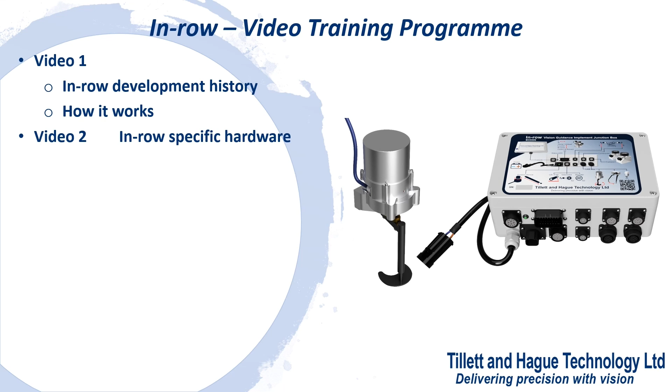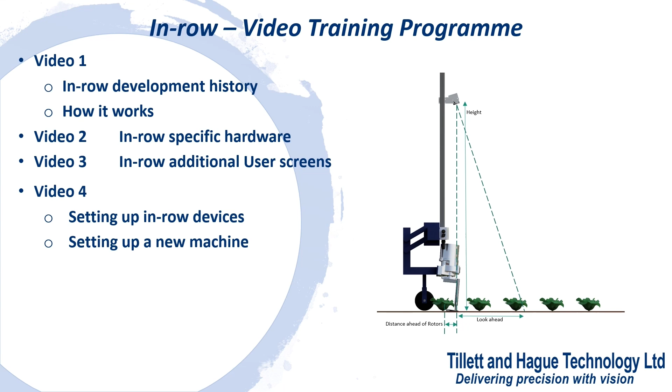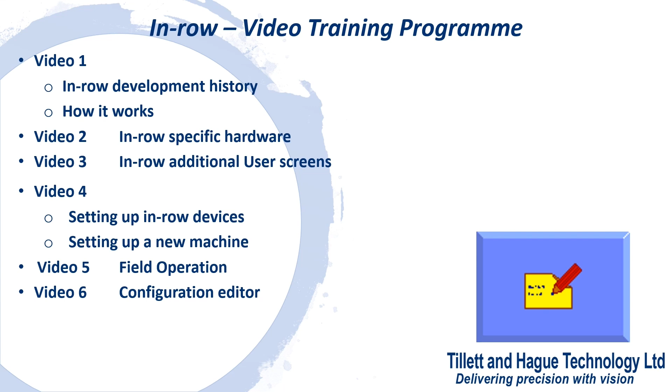After this introductory video, in subsequent video tutorials, we will examine the in-row specific hardware, explain the additional in-row user interface features, show how you might go about setting up a new in-row machine, and how to operate that machine in the field for the first time. Finally, in video 6, we will discuss how to use the configuration editor to configure additional in-row features. You can select the video you need from our website and view it as many times as you want.

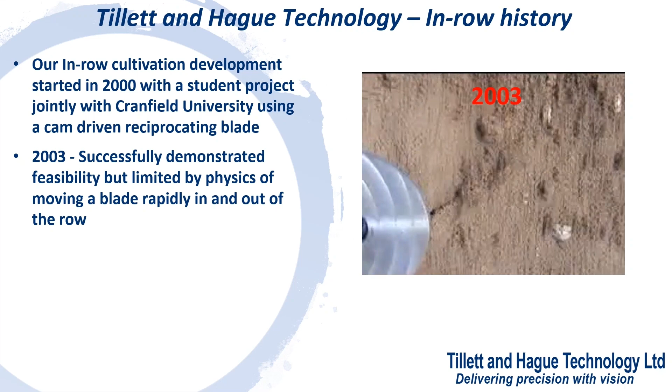Whilst we had been thinking about the in-row weeding problem from the early 1990s, it was not until the year 2000 that we made our first practical steps with a small project that demonstrated feasibility, but highlighted many challenges, notably the difficulty of achieving good within-row cultivation coverage at high speed. It was clear that systems with reciprocating blades would always be a compromise between speed, input power, robustness, and soil throw.

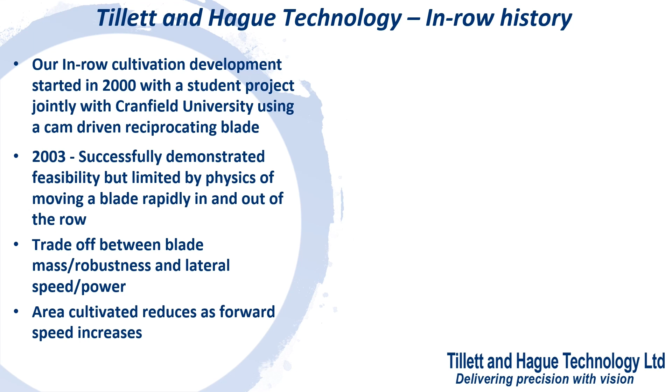Furthermore, for any system with a fixed insertion and retraction speed, the area cultivated inevitably reduces as forward speed increases. That realization stimulated our idea for a continuously rotating blade, phase locked with plants as they were tracked through an image sequence.

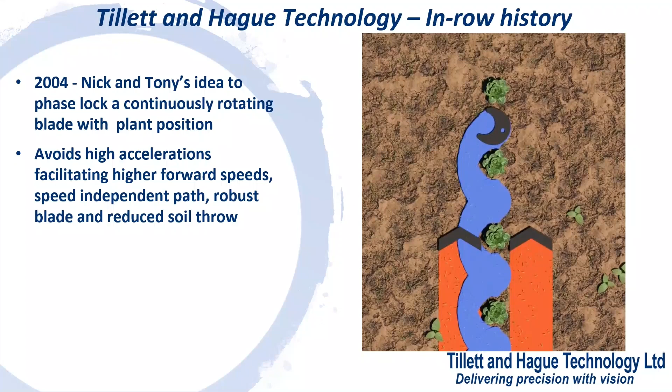This avoids high accelerations, reducing input power and soil throw. If engineered correctly, it also makes cultivated area independent of forward speed. Furthermore, reduced accelerations mean the whole mechanism can be made heavier and stronger without a performance penalty.

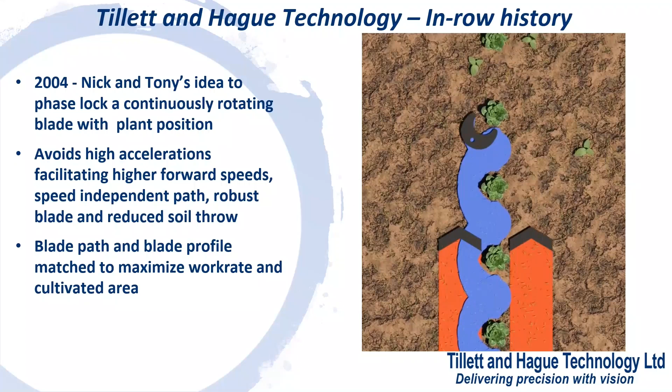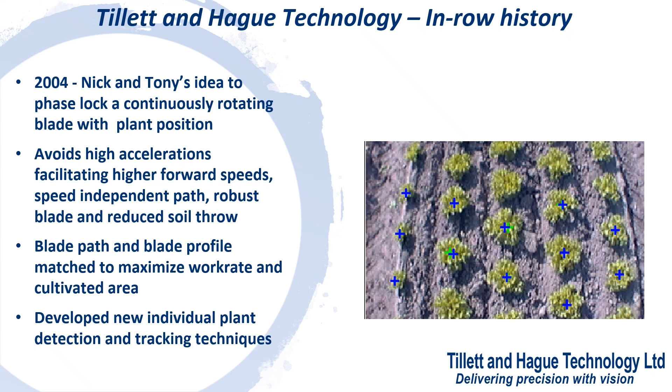The trick was to design matching blade profiles and smooth dynamic paths that gave good coverage without crop damage. Of course, we also needed to extend our image analysis algorithms to robustly detect and track individual crop plants as well as crop rows.

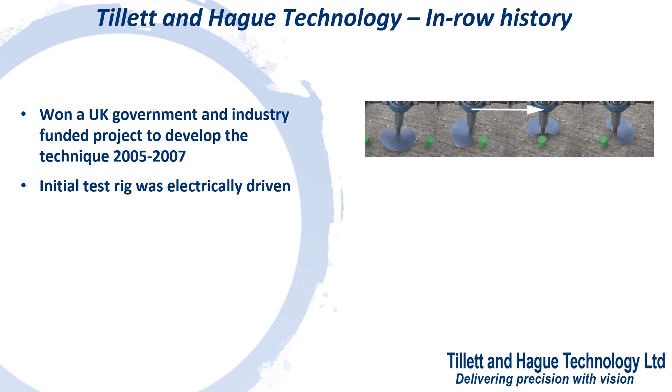Development of our rotary blade technique started in earnest in 2005. The first rig was electrically driven but had limited power. So, for production machines, a hydraulic motor regulated by a proportional valve was employed to deal with the relatively harsh weeding environment. It is shown here in prototype form.

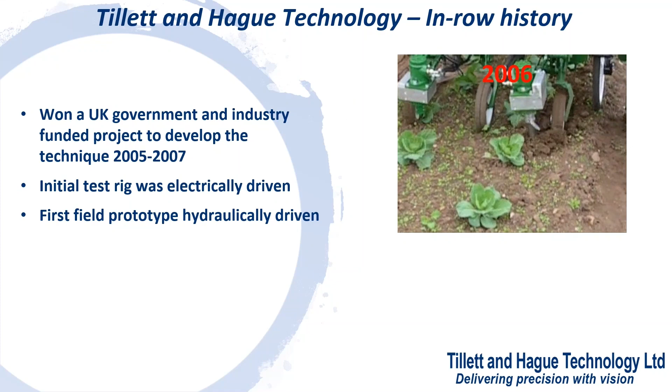The project was a success, and Garford Farm Machinery started selling hydraulically powered in-row machines using our technology in 2008. This video is an early example.

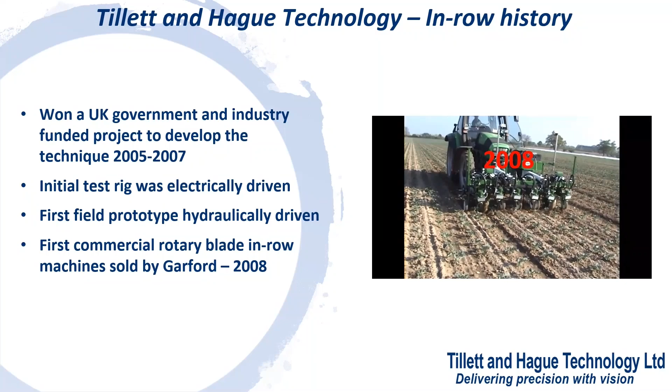At the request of a Californian customer, we also introduced the option to use the same machine running alternative software to thin salad crops, deliberately taking out unwanted plants to optimize spacing, as seen in this video, which dates back to 2008.

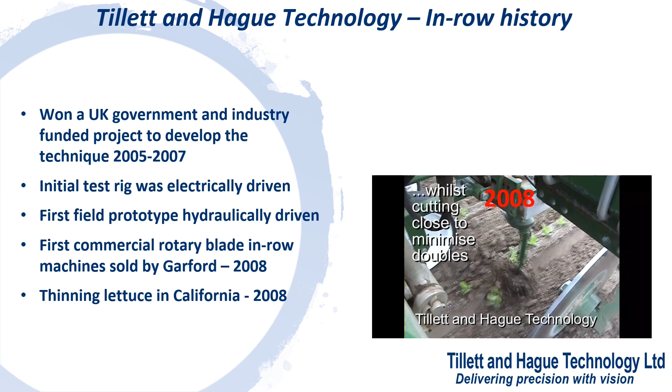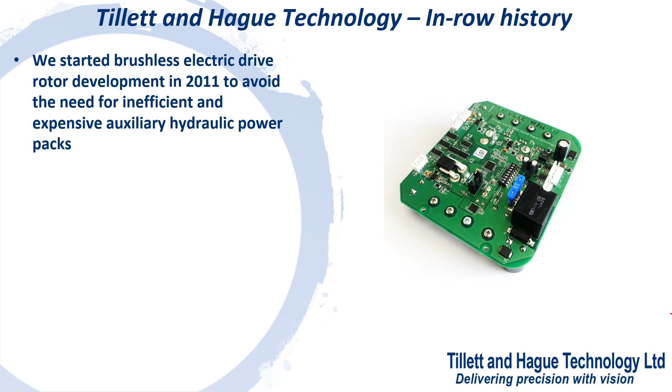These machines perform very well, but precise hydraulic proportional flow control comes with the necessity for large volumes of clean oil, which many tractors can struggle to supply. So, to improve energy efficiency and to avoid the need for expensive PTO-driven auxiliary hydraulic power packs, we undertook the development of an electrically driven variant.

We use a powerful brushless motor coupled to a robust epicyclic gearbox. The result is a faster and more precise system that can rotate at up to 6 revolutions per second, though soil conditions normally dictate more modest speeds.

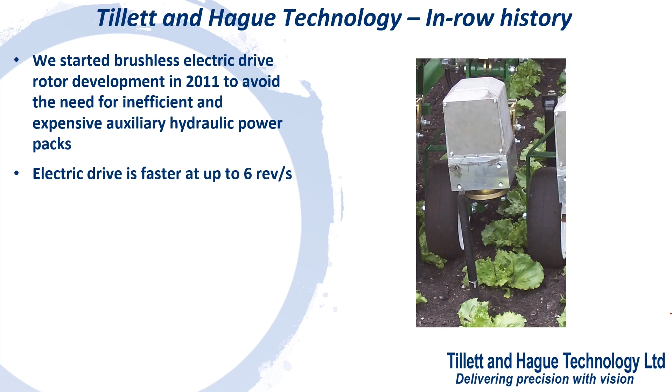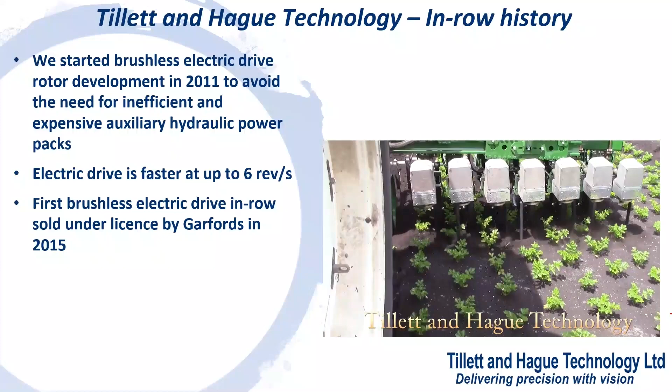The first commercial brushless rotor machine using our licensed technology was sold by Garford Farm Machinery in 2015. It is shown here cultivating 20 rows, demonstrating the feasibility of larger machines.

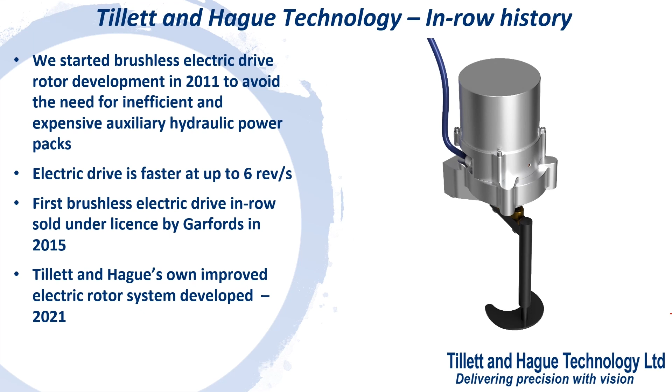In 2021, Tillett & Hague developed an improved rotor unit, reducing weight, simplifying setup, and improving reliability. We also now offer a complete modular wiring loom for ease of implementation and serviceability.

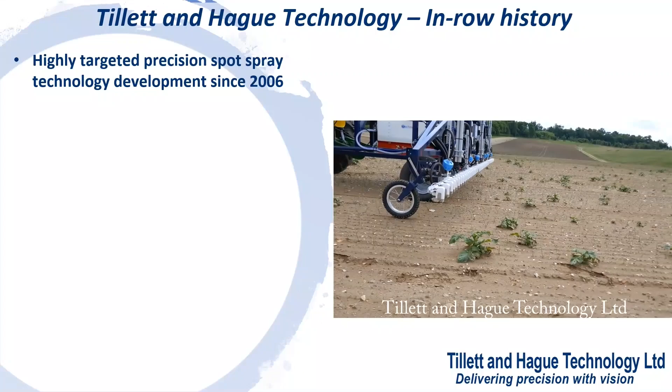At the same time, we had been developing systems for spot spraying individual broadleaf weeds in high-value drilled crops such as carrots and onions. See our separate video on that subject if you want to know more.

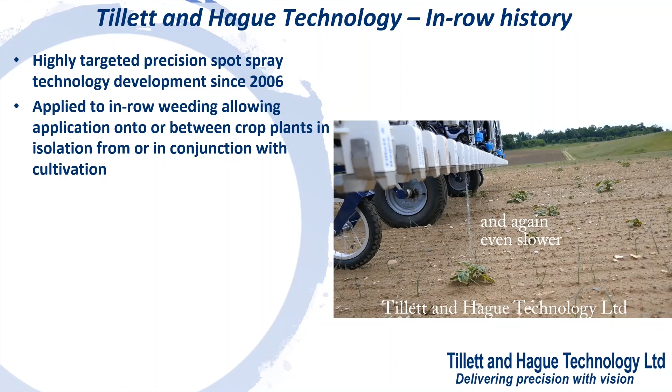We can apply some of that spray application technology to our in-row weeding system, allowing users to spot apply liquid inputs either between crop plants or onto crop plants. This can be done as a separate operation or done in conjunction with in-row cultivation.

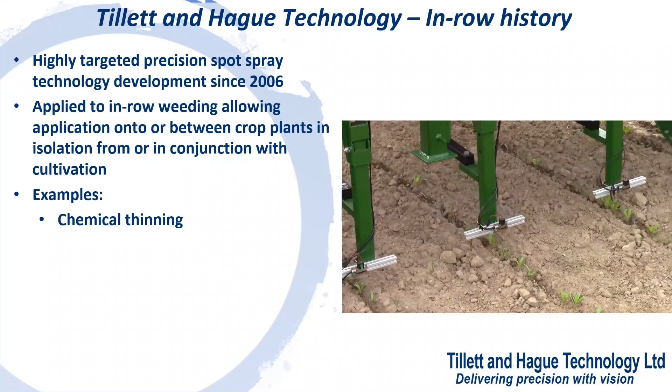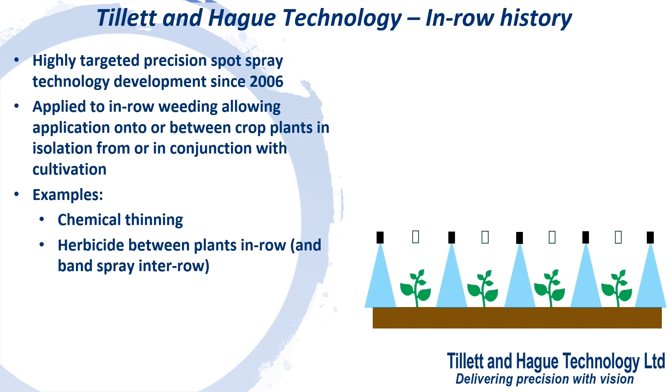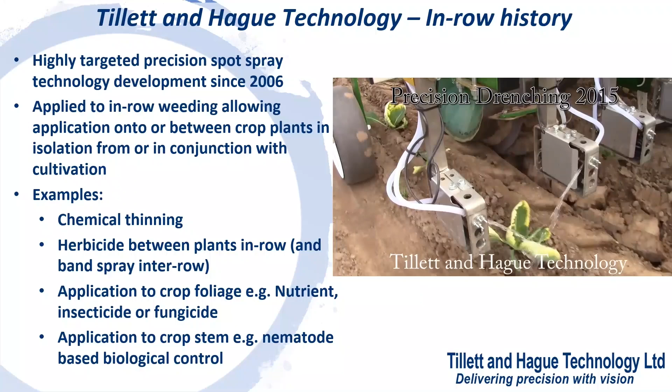Examples include chemical thinning, as shown here, treating an area between crop plants with herbicide, avoiding the crop itself, applying crop protection agents, chemical or biological, onto crop foliage, and application to the base of the stem, as shown here in this nematode drenching application. These approaches can result in large reductions in total application volume whilst maintaining efficacy.

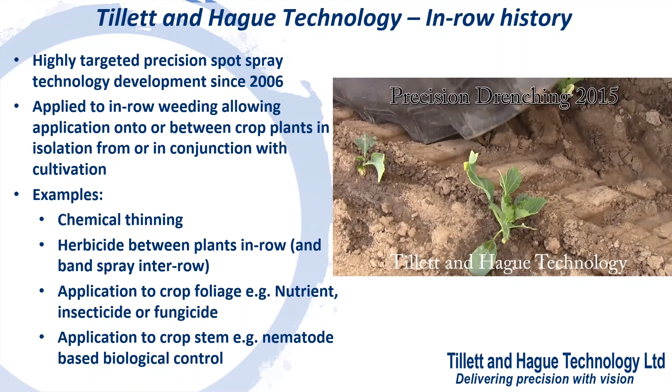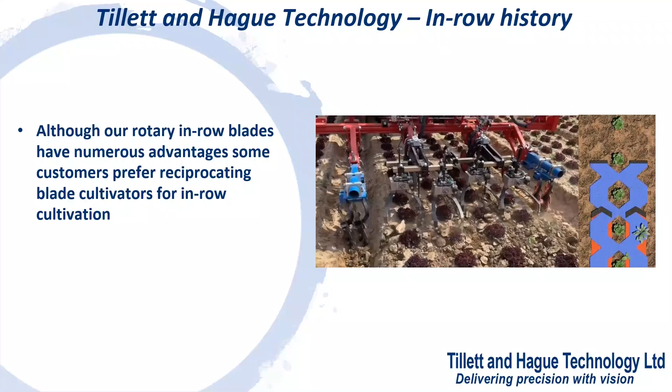In response to customer demand, we've also developed a reciprocating blade controller to allow Tillett & Hague guidance to control reciprocating blade type in-row weeding machines, as shown here. This feature was added in 2021.

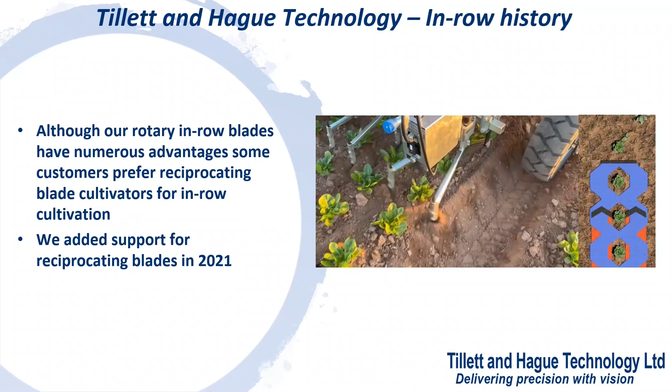We will now have a quick look at the principles behind how it works.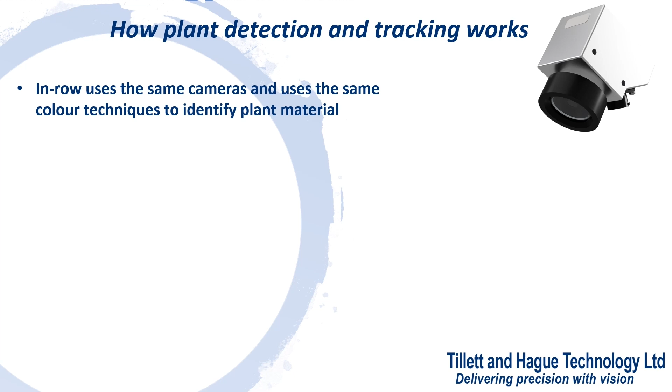In-row plant location and tracking is done with the same cameras used for inter-row applications. However, we match individual plants with a two-dimensional template representing the overall planting pattern rather than just linear crop rows. As plant pitch can be a bit variable, the template has some flexibility.

In-row weeding requires every individual plant to be detected, so it is necessary to view 100% of the cropped area with some margin around the outer rows. This constraint has implications for machine geometry and might require use of multiple cameras or wide-angle lenses to achieve the necessary coverage.

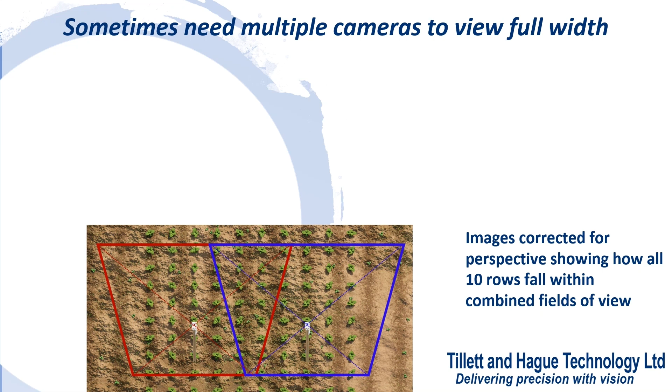For example, the 10 rows shown here can use 2 cameras, each viewing 5 rows, enabling all 10 rows to be tracked without the need for an excessively tall camera pole.

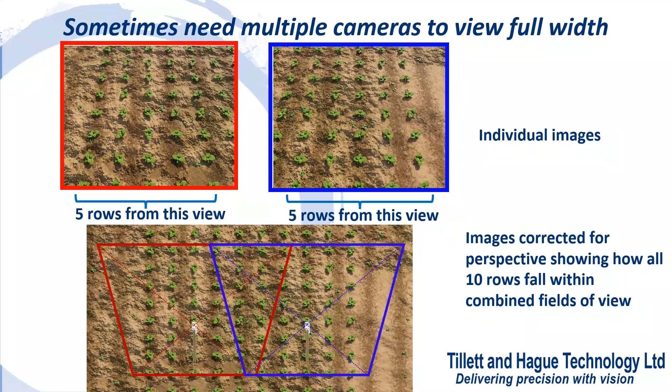Tracking individual crop plants is more sensitive to camera alignment than tracking crop rows. It is therefore normal to use automatic frame leveling to stabilize camera position. Our in-row controllers have such a system built in as standard.

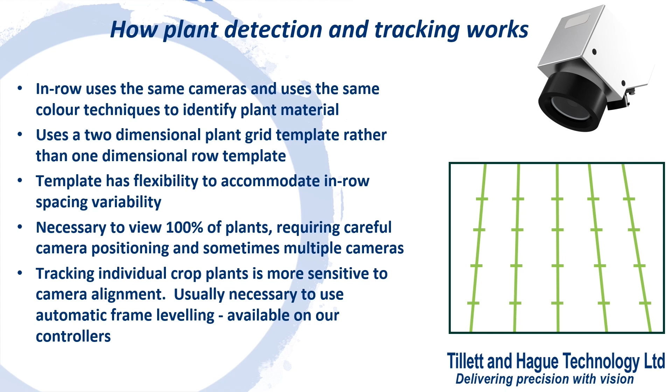As the machine moves forward and new crop plants enter at the top of the image, their position is predicted based on the predetermined template and the position of other plants already detected in that row. The search is conducted using that predicted position as a starting point.

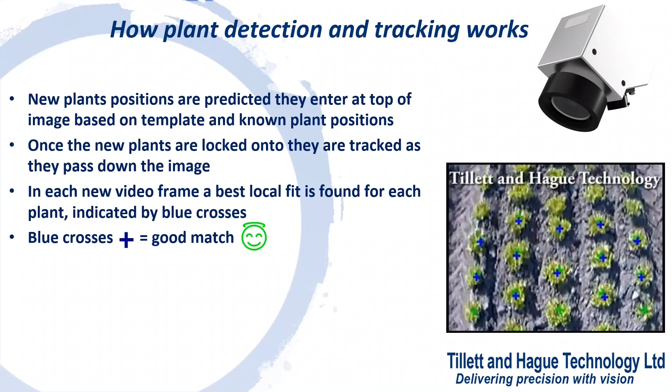Once a new plant is locked onto, it is tracked in successive video frames as it passes down the image. In each frame, a local search is conducted whose final position is indicated by a blue cross. If that local search does not find a good match, the cross will be coloured yellow. If the match is good but a long way from the expected position, it is coloured red.

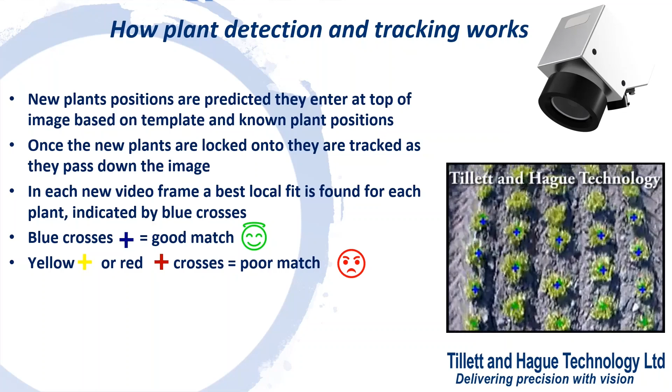Those local individual plant matches are used to update a tracking algorithm whose plant positions are indicated by green crosses. Those green crosses are normally not visible as blue crosses are superimposed over them. But as plants get close to the bottom edge of the image, the blue crosses disappear, leaving the green crosses visible.

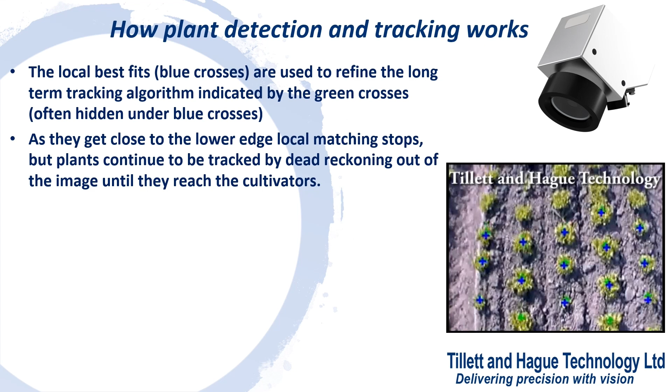From this point, plant position tracking out of the bottom of the image right back to the cultivators is done by dead reckoning. This puts more reliance on speed estimation than is the case for inter-row applications. Consequently, in-row machines are normally fitted with odometer wheels for accurate measurement of forward motion.

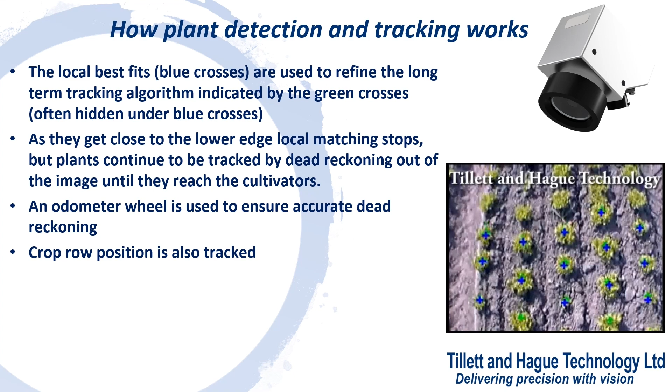At the same time, crop row position is also estimated so that lateral alignment can be maintained. Corrections to lateral position of the implement are carried out in the same manner as inter-row machines.

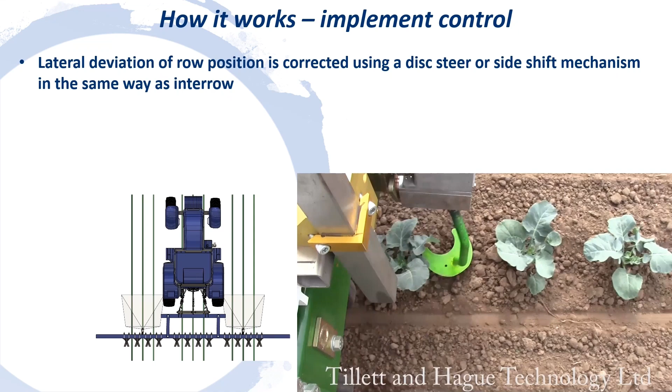Treatment devices such as rotors, actuators or nozzles are synchronized with individual plant tracks as they progress back out of the camera's field of view to the treatment device. This clip shows a rotor set to run above ground, demonstrating how rotors automatically adapt to variability in both plant spacing and tractor speed without changing the area cultivated.

If required, multiple devices, for example nozzles and cultivators, can be set up on a single row, thus increasing overall efficiency.

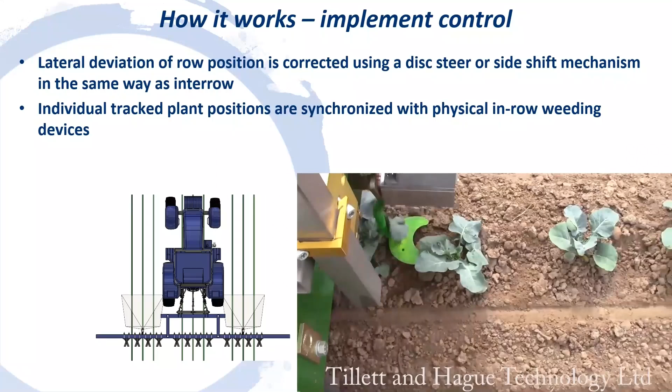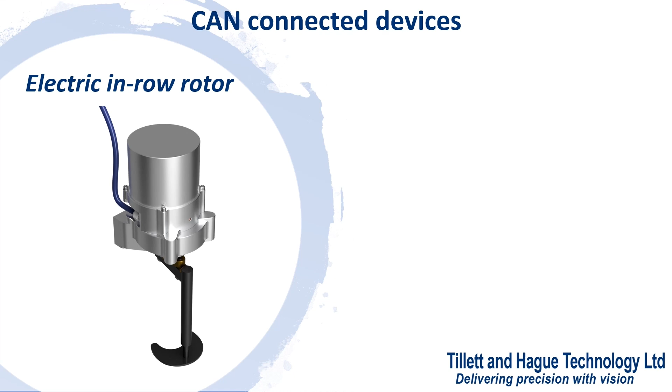Our system is modular. All treatment devices communicate with the main implement module via our proprietary CAN bus protocol. Brushless electric rotor drives individually connect direct to the network.

Solenoid valves for the control of hydraulic actuators or spray nozzles are driven from one of our multi-channel control boards, which are normally housed in a plastic enclosure and connected to the CAN network.

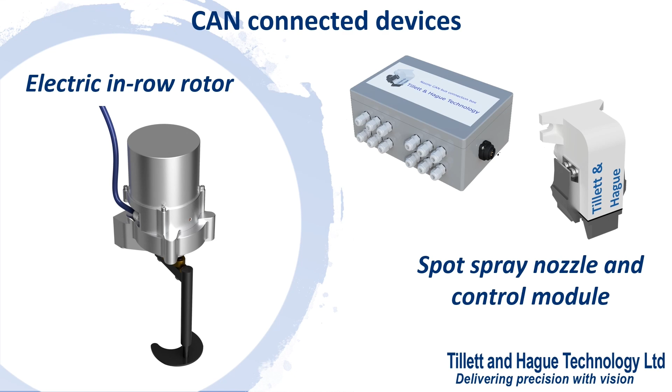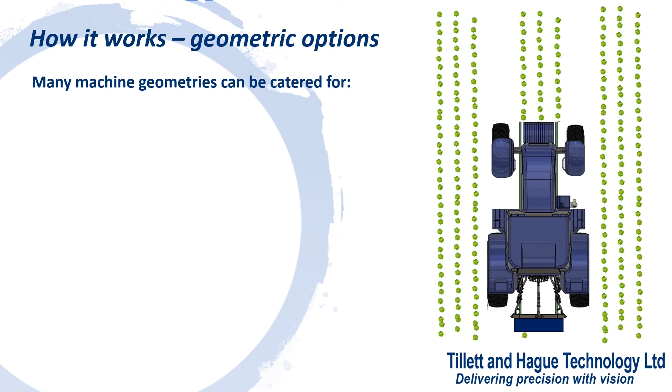In principle, all the geometries available for inter-row implements are also available for in-row machines. For example, front or rear mounted, in both side shifted or disc steered setups, and multiple sections to track independently planted bouts. However, remember ours is a vision-based system, so there must always be space for the camera to see an adequate area of crop.

You would not want to drive down the motorway looking through a letterbox, and similarly, our systems perform best when they have a good view of the crop.

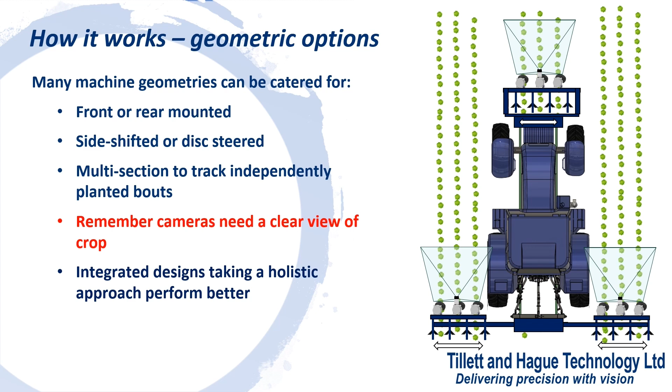For optimal performance, implements should be designed as an integrated system. Tillett and Hague are very willing to engage with machinery designers, taking a holistic approach to facilitate that integration. Close collaboration speeds development, reduces costs, and increases performance.

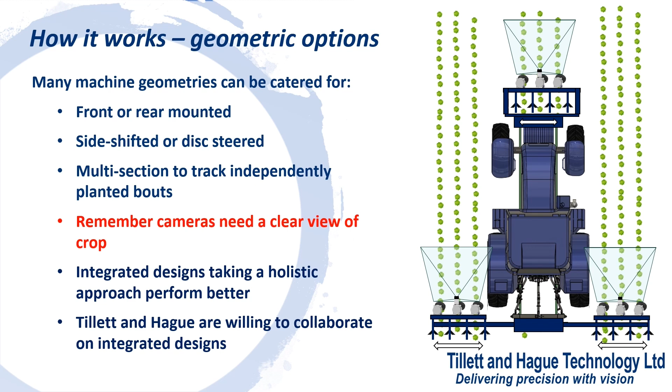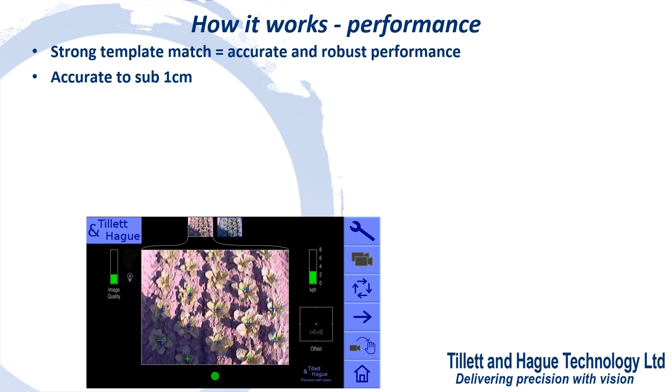Our approach is based on template matching. The more accurate the template match, the better the performance. The system scales from large to small machines. Typically, we would expect guidance accuracy to be within 1 centimetre.

In-row rotors have a maximum speed of about 5 plants per second per row. For plants at a 30 centimetre pitch, that equates to 1.5 metres per second, or just over 5 kilometres per hour.

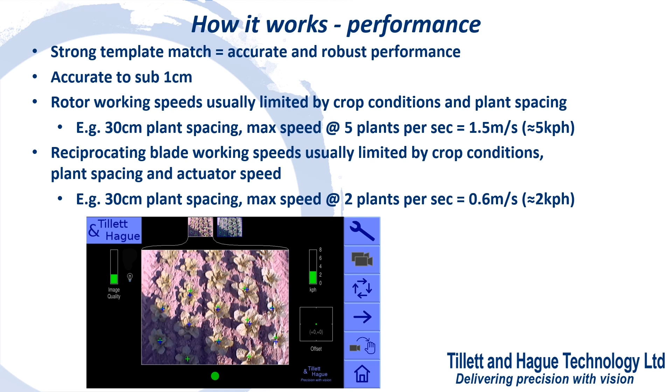Reciprocating blades are generally limited to about 2 plants per second. They can be made to run through the crop faster, but the blades do not have time to fully penetrate into the row, so the efficacy reduces as speed increases.

So, to conclude, backed by over 25 years of research, we can offer implement manufacturers a range of guidance options for crop protection applications ranging from mechanical weeding, both within and between crop rows, to the precision application of sprays.

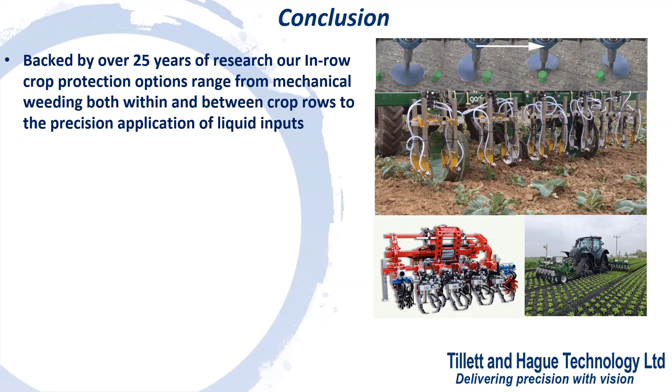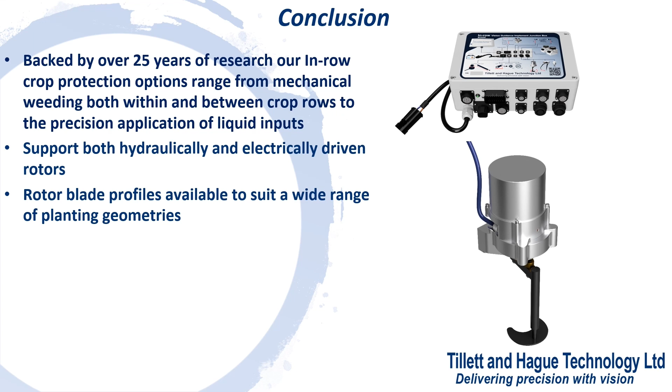We can offer systems for both electrically and hydraulically driven in-row rotors, along with suitable blade profiles. We can also provide control systems for reciprocation blade type in-row cultivators. It is also possible to control spot spray nozzles or applicators, either in combination with mechanical weeding or as a separate operation.